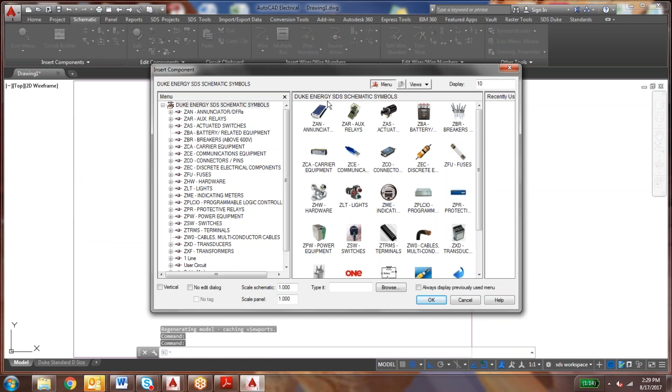So real quickly, I got two breakers here. One's a breaker that's a pass-through, and the other one's a non-pass-through, just to show once it gets there. That's the pass-through variant, and the non-pass-through is going to be on the right.

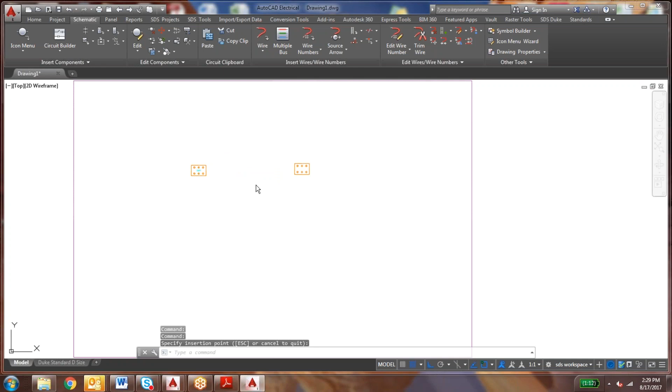Y'all got cool pictures in there. I know, we try to make it pretty for our customers.

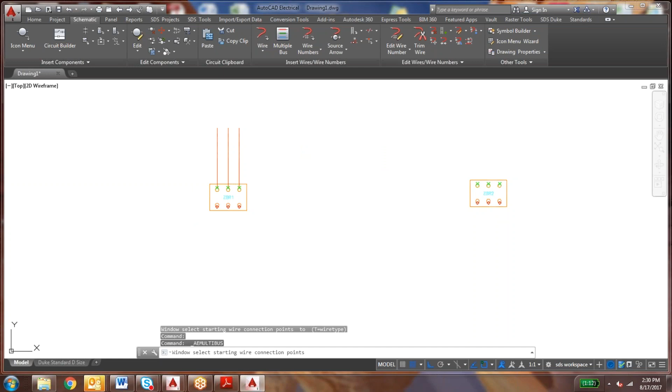All right, so I'll just go through the wires on these real quickly. I had all this set up on the other one, but it froze up on me, so I'll just have to throw them in here as I go. Shouldn't take too long. I guess I could have done both sides at one time, but that's what I'm thinking of doing. They're short, but it's okay.

I guess don't take my machine either as what our normal user machines are. My thing is it's destroyed. That's what we do all the testing on, so I need to tell them what actually will work and what won't work. So I'm just going through some phasing on here, say A phasing, for example.

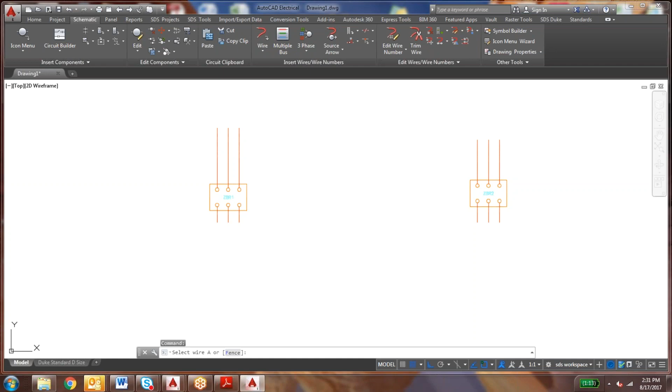We're incrementing through A, B, C. So in essence, what this should give me, I believe, with the actual—this has the WD jumpers in it—so we should get an ABC on the other side. The easy way to check that is just to do a copy wire number, because that pulls the wire number from the other end. If I click on here, you'll see that it's now ABC.

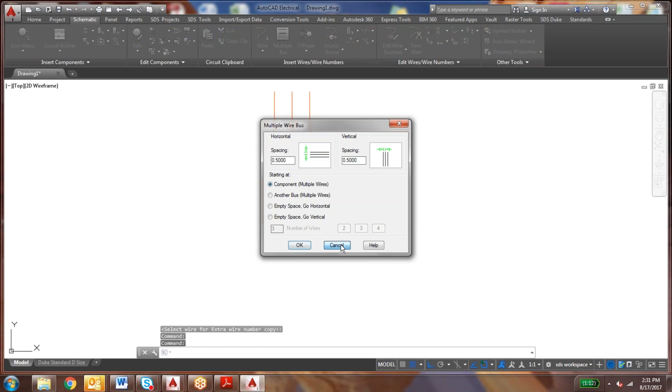So now this is a pass-through. Now if I try to do the same thing on the other end, for example, do another A, B, C, and then again trying to do the same function here as a copy—now I'm clicking, it's not giving me anything. So this is telling me that I have to pick another wire number, so it's a non-pass-through.

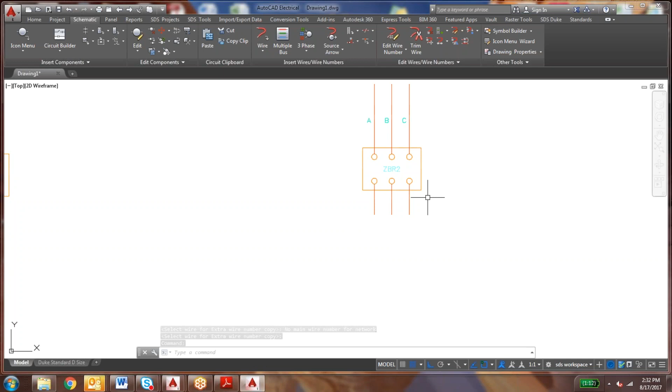So again, this one has the actual WD jumper attribute within it, which is over here. That's the WD jumpers attribute, and this is what it kind of looks like. So it's telling it that it's going from 1 to 4, 2 to 5, 3 to 6.

So using the WD jumpers with the non-terminal type of devices, that's what kind of helps you get the wiring information from one side of the block to the other side of the block without it traditionally being a terminal. But yeah, you still want the numbers to go through. So that's kind of the hack, or the hack of the day that was discovered.

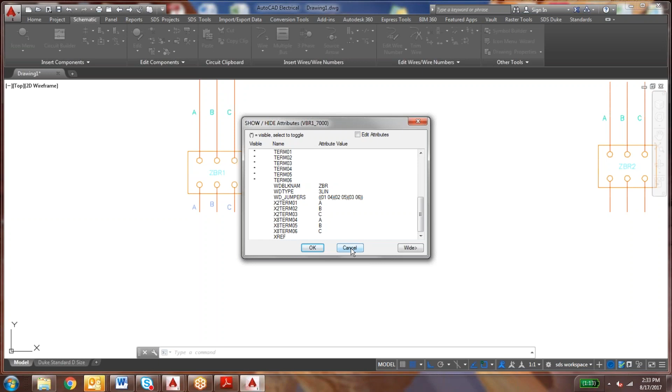And again, I'll give credit to where credit's due—Southern, I believe, was the first one to start using that, and it made sense and it works, and I think everybody would like to know about it. So that's one good discovery that happened there. If you've been having troubles or wondering how you want to do that, that's the solution, I believe, that has worked very well.

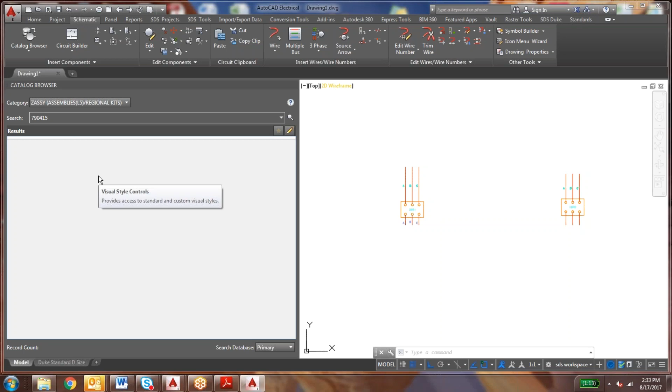And I guess also, if I can remember real quickly, one thing I kind of wanted to talk about fast about wire numbers that we unfortunately had to learn the hard way one time, was that we have wiring diagrams—I'm pretty sure everybody else does—that go in a horizontal fashion to make sure everything fits, because you don't have enough room vertically on the drawing with a D-size print.

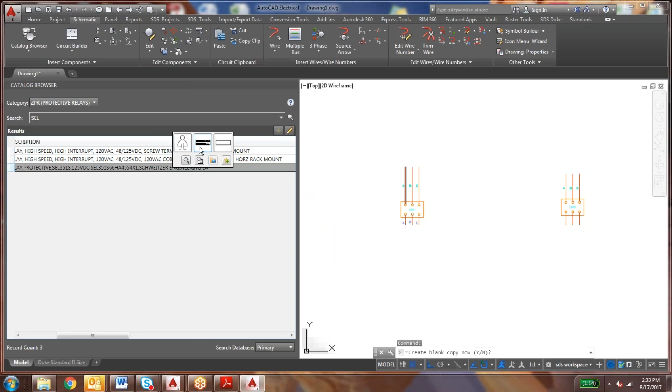So let's kind of grab something here. One thing you got to keep in mind, or one thing I don't know if everybody's run through this, but I know unfortunately some of our users... things are backwards, but that's okay. Some of our users, we had to bring in these wiring diagrams, and they would have—well, that's not actually a panel. I don't know why it's not pointing at the correct one, but it's weird. That's okay, I'll work with it.

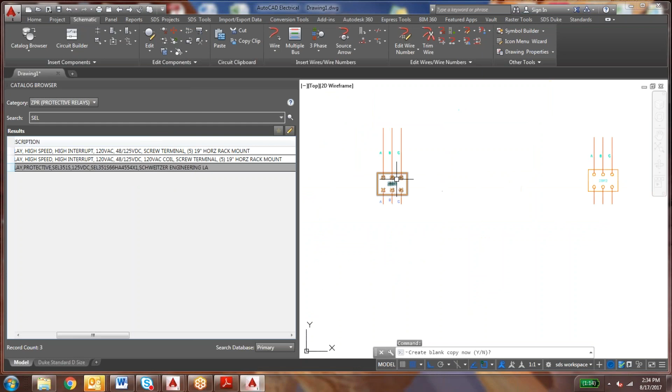So we had some wire diagrams where we want to show a connection, say for a communications cable or something. That's just going to be one wire sticking up out of the actual wiring diagram block with all the annotation on it. But the users kept bringing them in and rotating them.

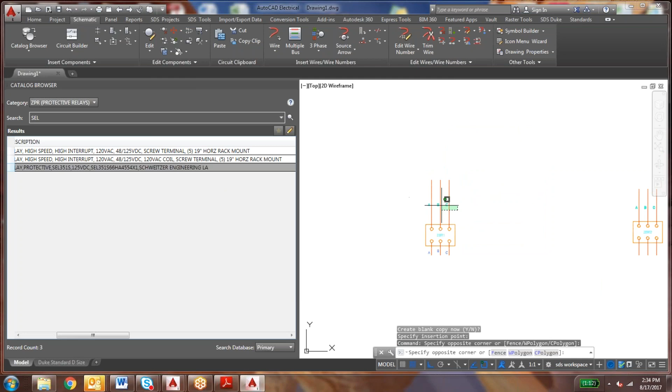So, for example, say if I use this block as a quick example. Most folks would bring these in and rotate them, because they wanted things to go left or right so they could fill in the print. One thing we found out was that once these blocks are built with a particular direction of wiring connection, and you try to rotate it to make it fit left or right, because you're still using model space for both your title block and your content—

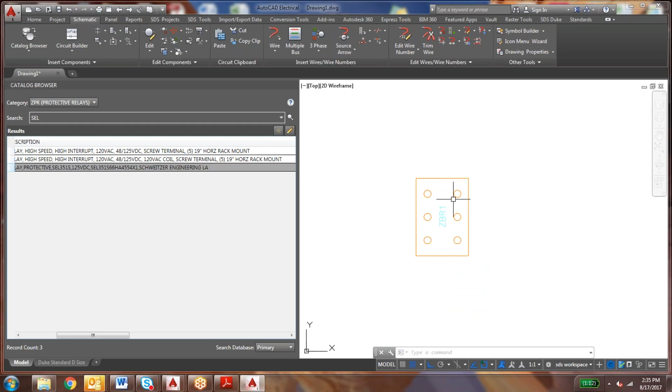You may not be doing that anymore. I know when I came in 2012 at Duke in the Charlotte area, they still were doing that. So of course we had to move to paper space, model space. But if you try to bring in a wire, say I want to bring this out to my left, and this is actually built to go up, you'll notice it does not want to go out. It wants to go up or down because of the way the connection is created.

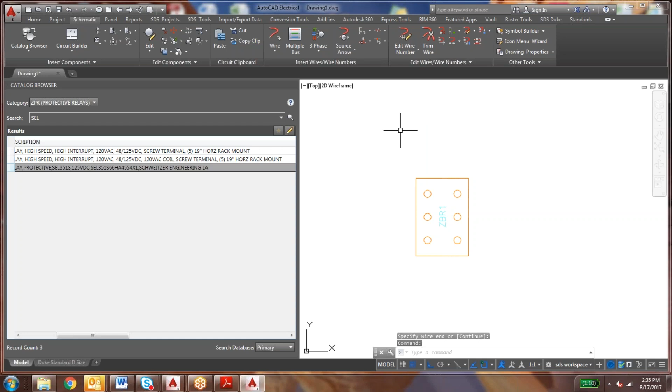So I guess the thing we had to learn, or had to teach our users, is not to rotate these blocks and parts inside of model space to get the orientation you want it to fit on the paper. And again, you may or may not know this already.

So obviously our recommendation or solution was for them to have the title block on paper space, go into the viewport, and just literally rotate it—then everything fits fine. AutoCAD Electrical works the way it's supposed to, and everybody's pretty much happy. So yeah, that's kind of my takeaway.

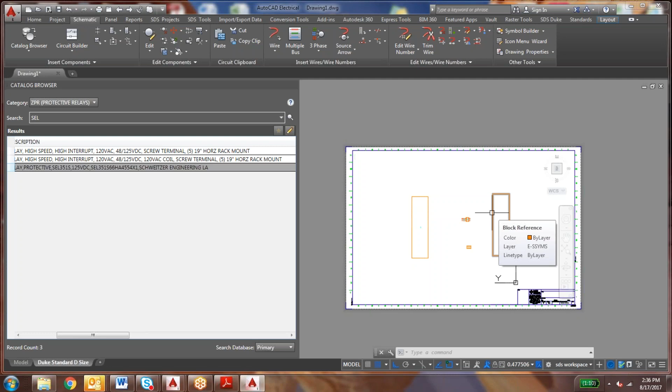I guess I wanted to make sure everybody is aware, if you may not be, that when you start building these blocks with wiring connection information, once those wiring connections are embedded into that block, it's kind of set. So it's hard to get it to go in another direction than what it's built to go in—either up, down, left, or right. So if you have to do any rotating to make anything fit, the best way is to use a viewport.

Hey Jared, we didn't actually build ours that way. We built them with horizontal and vertical versions, and we can just move it around—switch between horizontal and vertical—and it'll change direction. That's the way our blocks are built. Yeah, that's how we built ours too. Well, yeah, we didn't do it like that.

Well, back when I first got here, that's the way they were created, and that was one thing we ran into. I think, if I remember right, David kept trying to rotate them and go left with it, and it wouldn't work—it's not built to go that way. Yeah, well, they're not built like that anymore. No, yeah, I know they're not now. I guess I should clarify—that's what they used to be in the past. I'm talking about five years ago.

But for the folks that may not know and are just starting in, just keep that in mind—that once those directions are set, they're pretty much set. And if you try to rotate things, they will still try to go in the direction they've already been created for.

Yeah, you need to tell them—what they need to do is just build a horizontal and vertical version with the same designation, except one says H at the beginning and one says V at the beginning, but they should have the same number. This is a bad example—I know what you're saying. Think about the schematic block as a wiring diagram block; it doesn't have H or V on it. I'm sorry, I was probably using this in a bad way.

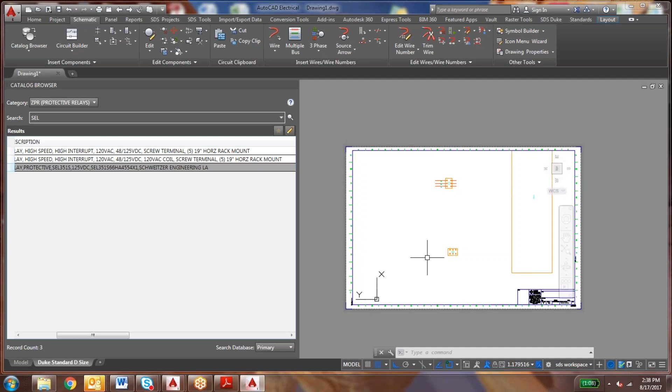I guess, Frederick, for your concern? Oh, I've been clear. Okay. I just want to make sure I wasn't clear in my own head, so I wanted to go ahead and make sure that was correct.

So yeah, you're right. Once those designations are there, it definitely makes a difference. But we've been doing it the same way as far as schematic symbols, having a horizontal version and a vertical version. That way, whenever you have a vertical line or a horizontal line, it doesn't matter. Once you go to insert that block, AutoCAD Electrical knows which one to insert, a vertical one or a horizontal one, and then it's always correct.

That's correct, we have 4 blocks. 2 of them toggle the orientation of the bushings on them. But yeah, I understand what both of you guys are saying.

Okay, hopefully for the others getting into it, it makes sense. But of course, we can probably go into way more detail than that at some point in the future, if need be.

But yeah, you're right with the H and V stuff. That's what tells it which block to throw in based upon the actual wire you're putting it on top of. So it's kind of, basically, in a nutshell.

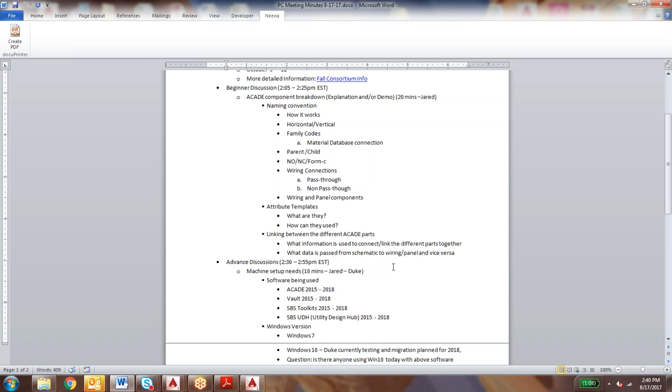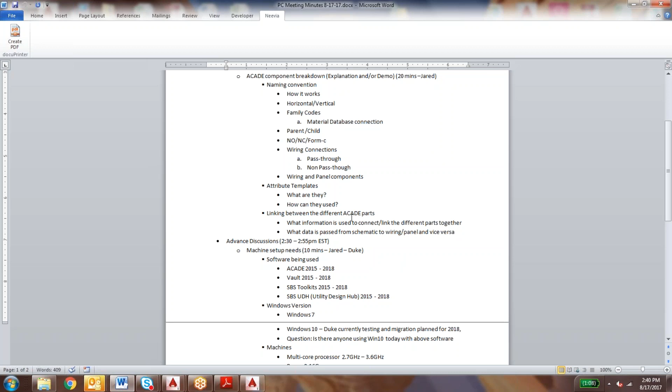Again trying to go quickly through this, how the wiring connections are being used. I'll go and skip the other parts for right now, because I'm trying to keep mindful of time. I know I'm 10 minutes over. Just want to real quickly touch on this so I can give Brandy some time to show his thing.

So real quick, I didn't know if I should put this in the beginner section or the advanced section. The machine setups, I know this was another block of discussion, or some things you guys might want to know about on what type of machine you need.

So right now, the software being used is AutoCAD Electrical 2015 to 2018, Vault 2015 to 2018, SDS Toolkit 2015 to 2018. I think, Nate, you guys have the 2018 variant out now, correct? I think, with Trevor, email.

Yeah, 2018. I had to find the button. Yeah, 2018 is out there. Okay, I just wanted to make sure.

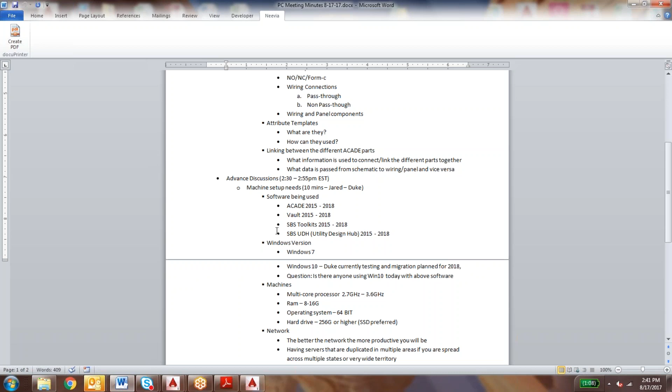And I believe the UDH, if anybody hasn't had a chance to look at that yet, the Utility Design Hub, is also available from 2015 to 2018 as well. So those are kind of the main softwares for P&C design within the SDS environment at the moment. Of course, everything under ACAD also includes Raster Design, AutoCAD. I think that's kind of it, if I remember. There might be some other little things here and there, but I think that's the bulk of it.

So the Windows versions we're currently on, I don't know about everybody else, but we're currently still on Windows 7. We do plan on going to Windows 10 next year.

I guess what I will say is I had a question here: if anybody else is currently on 10 and using the AutoCAD Electrical products with the toolkits, is everything working okay? Because that's one thing we're going to have to be testing, to make sure everything functions correctly going from Win 7 to Win 10.

We went to 10 about a month ago, and everything's working like a charm, so no problems. This is Northern Randy, and I've been using 10 with AutoCAD Electrical products for several years now, including the SDS Toolkit. Okay.

So that's encouraging, at least that tells me it does work, and if it doesn't work on this side, something else is wrong. Unless it's obviously an image issue, because I'm pretty sure all the other utilities work. But I know one of the biggest things we have is specialized images put onto our machines, so there might be some limitations there.

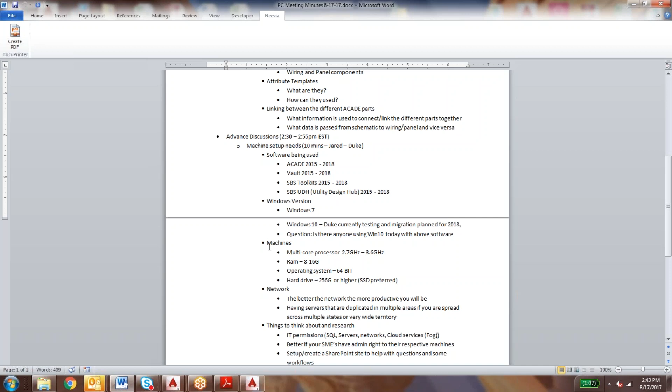One thing we had an issue with, and everybody chalked it up to be a Windows 10 problem: when you load AutoCAD Electrical in the start menu, if you have it automatically set to pop up the start tab, we were getting crashes every time we tried to load it. As soon as you click on that start tab, it crashes. So we just decided to load it without the start tab, and it's working fine now. I don't know if that's the solution, but that was the conclusion we came to.

I'm pretty sure there's probably going to be some things here or there that we'll all run into once they come up, and again our own internal IT organizations will probably have to mitigate some of that in one way or another. I just know our current state is still on Win 7, and that's our platform until the end of next year, when our official migration happens.

But I guess if anybody was wondering if it does work on those platforms, with confirmation from you two folks, it seems like the answer is yes.

As far as what type of machine you use, I know on the Inventor side there's a really hot topic on how much power you need. This is kind of my own personal opinion on things. I know technically we cannot promote any specific company when it comes to hardware, so I kept it generic.

Obviously you want a multi-core processor. Mine currently has a 2.7 gigahertz processor, but you could have a 3.6, 4.2, or 4.0, whatever you want. With the 2018 processing, a multi-core one is definitely the way to go to make it the most efficient.

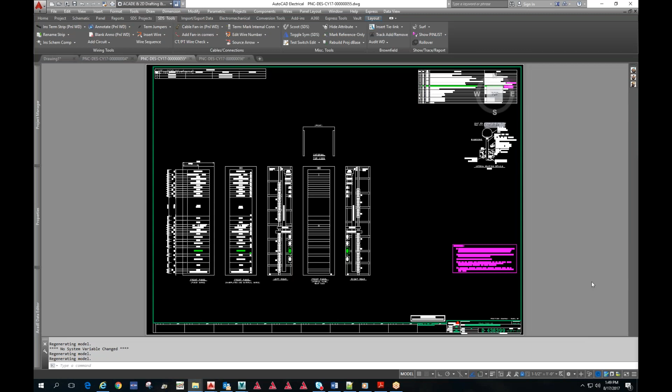Okay, copy design. Can you all see my screen? Yes. Okay, I'm going to play this video and try to commentate because we couldn't get the sound to work earlier.

Basically, what we've been doing is, in Vault, we have all our standard drawings in a folder, which is this library folder right here. All our standard drawings are in that folder, and all our projects are in the OpCo projects folder down here. Before we start a project, per standard, we copy that standard from the standards folder into the OpCo folder. I'm going to hit play on this and commentate a little.

What you're seeing right here is actually a view of the project folder, protection and controls. These are all the files I have in there so far, and notice I already have a WDP file in there. So when I do this copy design from the standards folder, I'm not going to copy the WDP file since I already have one — I'm just going to copy the drawing files into this folder.

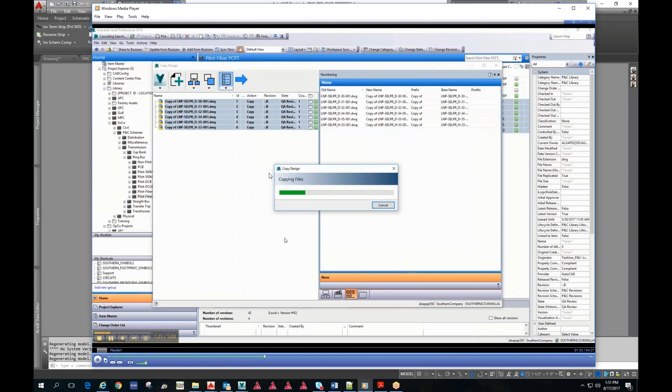So it's copying those files into the protection and controls folder. Just close it out. So I'm going to go down to the protection and controls folder and notice that those drawings are copied there.

At this point, I have to change the category of these drawings, because different categories determine what states or life cycles you're going to have in your drawings. This is P&C design, and we have different states or life cycles within the design category. So I changed all those drawings to the P&C design category.

And then I have to rename these files. There are separate naming conventions on these files. You have P&C, physical and civil, and other naming conventions. We change our file names to the P&C naming convention by going rename and selecting the drawings. As you can see right now, they're physical.

Right now, I think you rename those prior to copying them over if you need to, if I remember right. Oh, really? Okay, yeah, I think you have the option to do that. Okay, so either way works.